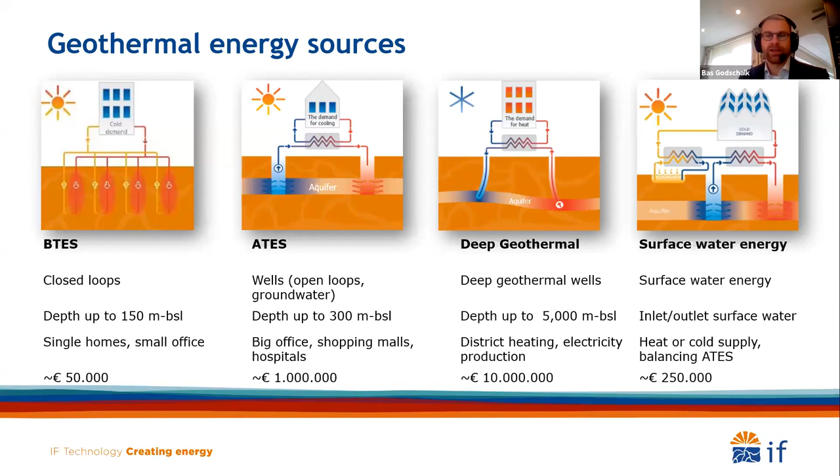Let me go a little bit more into detail on aquifer thermal energy storage systems. I think the most important is that you really store the seasonal heat and the seasonal cold in your subsurface. By storing this energy, you can reuse the heat from the summer during the winter time. And during the summer, you can cool your buildings directly by the cold water which has been stored in your aquifer. Important is that we only have a very small temperature difference in the aquifer.

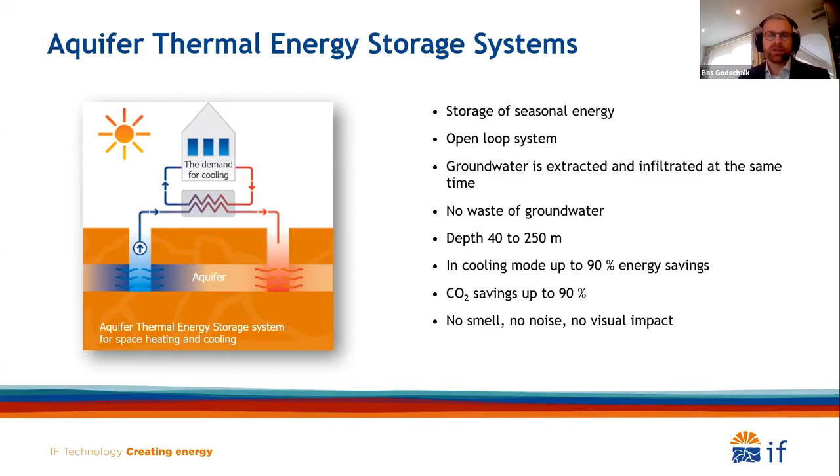The normal temperature is about 12 degrees in the Netherlands. So our cold well will become about 7 degrees and our warm well about 17 degrees. This results in a very low impact on the chemistry, physics and microbiology in the subsurface. Another very important point is that there is no depletion of groundwater. The amount you abstract is exactly the same as you inject. That is a very big advantage when you also want to protect and take care of your groundwater resources. And of course, very important is that your energy delivery is very efficient, so your COP is very high.

Let me give some examples of projects. On the left side, you see the Technical University of Eindhoven, which is one of the biggest ATES projects in at least the Netherlands, and I think Europe and maybe the world, developed during the last 20 years, starting with a small heating and cooling grid, connecting a couple of wells and a couple of buildings. During the years, they expanded by adding more wells and more buildings. This is a very smart growth model, spreading the investment cost over the years, while in the meantime you already have the savings of your investments.

Second project in the middle is in Amsterdam. If you look at the numbers, you can see that the max flow rate will be about 500 cubes per hour for 2 wells. So that means that we can abstract here with just one well 250 cubes per hour, which is a very high rate and which can only be done around Amsterdam, where we have a very nice sandy aquifer.

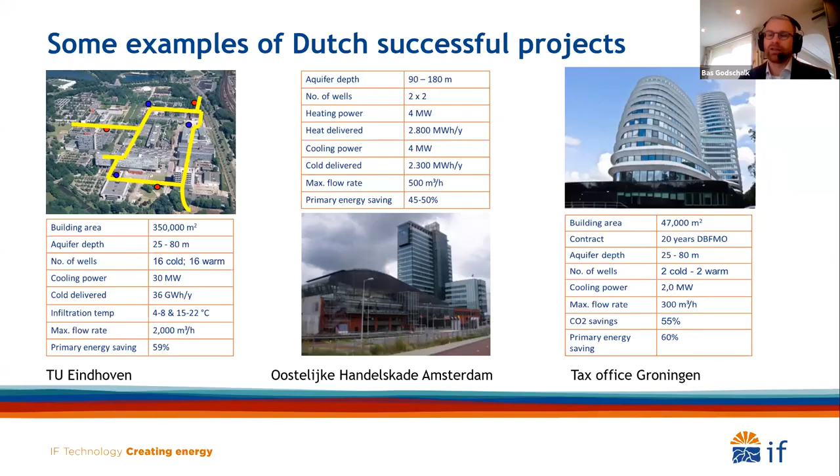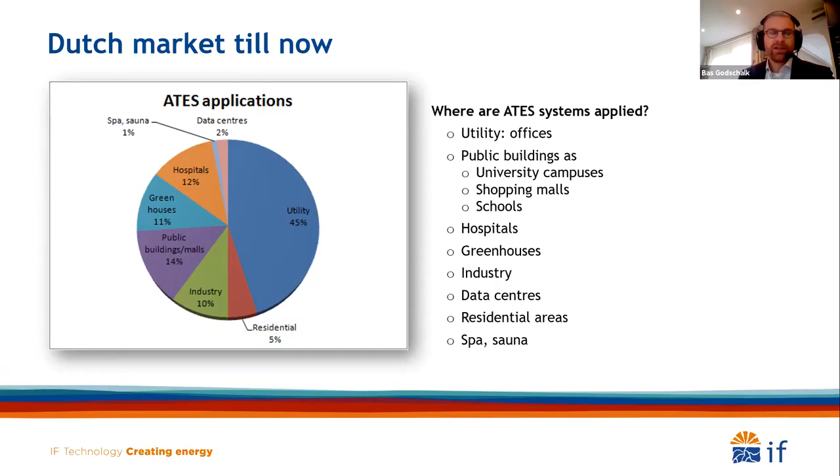When we look where ATES projects are realized, more or less half of them are commercial buildings like offices, and the others are hospitals, greenhouses, public buildings, and also industry. A smaller part is the residential area, but that will change, and I will tell later about that trend. In the Netherlands in 1990, there were only a couple of systems, but during the years the amount of systems expanded, and at the moment we are counting around 3,080 systems.

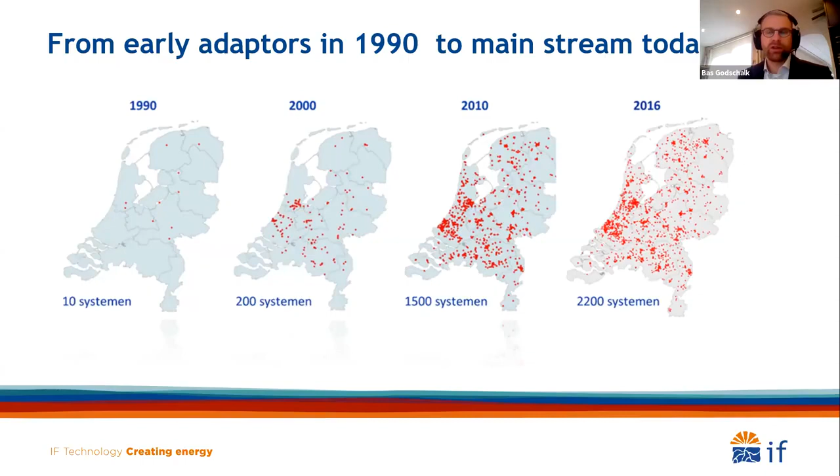Worldwide, we see that in Sweden there are also many systems in the southern part, and some in Belgium, also in the UK, which we worked on in London and Birmingham, some in Germany and other countries, but not very high amounts, especially not for bigger systems. In many countries you have some combination of groundwater abstraction with small wells and heat pumps, but not the big applications.

Why is it a success in the Netherlands, and why could it become a success also in Ireland, in Northern Ireland? I will go into a few details. I think one of the critical issues is, of course, you need an aquifer because you need to abstract and inject the groundwater. We have very proper aquifers, and that means that nearly everywhere in the Netherlands you could apply this technology. That makes it very attractive also for project developers to start up a project, because they more or less know that they can apply it.

And we have also a very good database which is freely accessible at TNO, and you can have a very accurate idea of how the layers are built up, which means that you can save on the initial cost like doing a test drilling. And this is very important because then you can move on quickly.

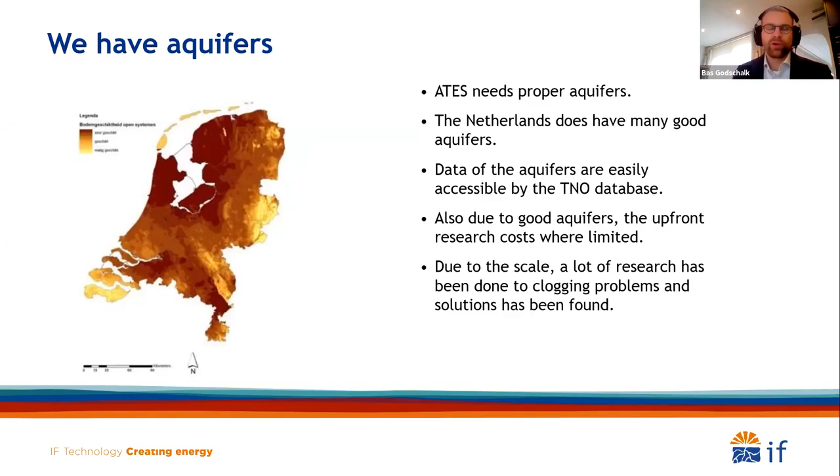But it's also very important that you have a good climate, because you use the seasonal heat and the seasonal cold to store it, and you reuse it in the next season. And we have seen that especially cooling is very efficient, with COPs between 30 to 40, which means that you can have a very attractive and good business case.

That will really help. I've just worked out a very small business case for a project, a building in Belfast. I did some assumptions just to show you a little bit, to get a little bit of feeling of the numbers. It's a big building with 100,000 square meters. And based on the starting points, I made an energy concept. And by using the energy concept, I made a cost calculation.

And in the upper part of the table, you can see the investment costs. And of course, the ATES solution will be more expensive than the conventional heating and cooling by gas and using chillers. But when you look at the exploitation cost, you will see that the energy costs are much lower than in the conventional way. And that brings, if you divide these numbers by each other, your return of investment to around 2.5 years.

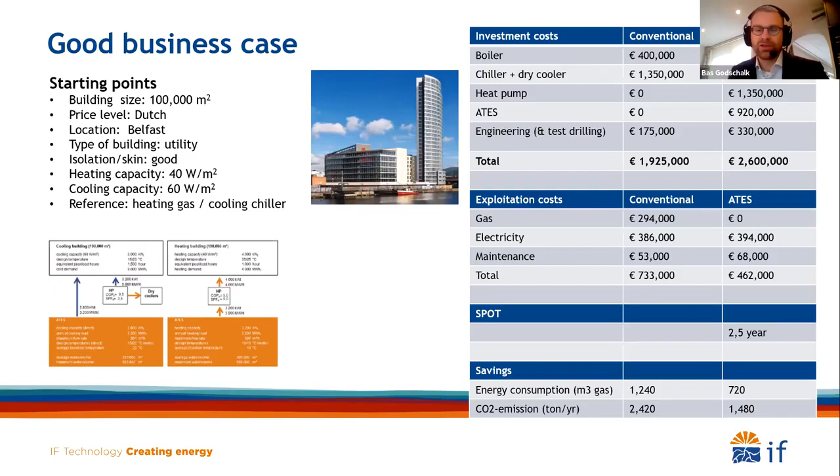Of course, it depends on the starting points and assumptions you make, but it's quite a normal number in the Netherlands that your return of investment will be between 2 to 7 years. So you also see in the last part that you can have serious CO2 savings by using ATES.

What's also very important is that we have a proper legal framework, because you see in countries where there's a lack of a good framework that project developers are not willing to invest, because they're quite unsure if they can run their system for many years. And that's why it's very important that you work on a very good, reliable framework where it is clear what you have to submit to get your permit, and that you also have a clear demand of what you should measure during the time. And don't ask too much, because then the exploitation cost will become very expensive.

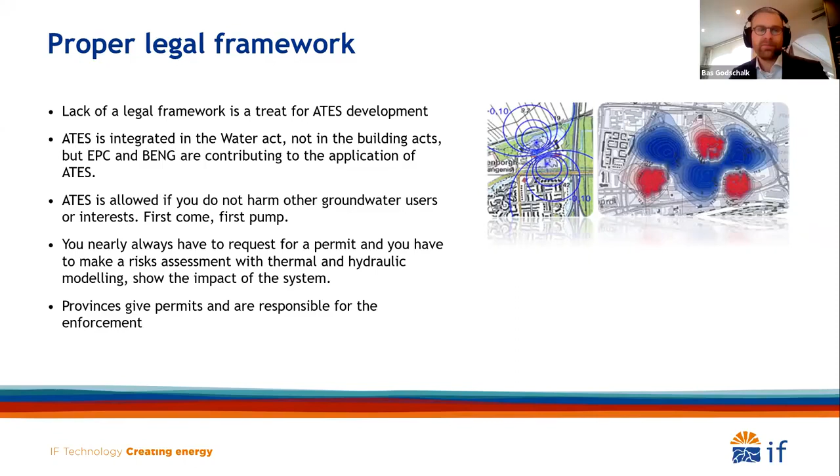What's also very important is that you know that there are different interests which you should bring together. So one department wants to save energy, the other department wants to protect the groundwater, and the project developer wants to earn money by developing good and green buildings. So you have to bring these different interests together and put the point on the horizon where you want to go, and then think how you can combine these interests to have a good legal framework.

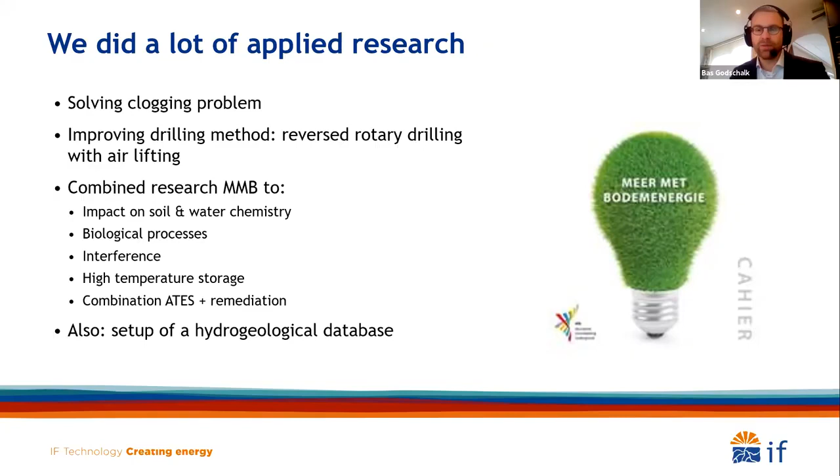As mentioned, the return of investment is quite interesting. In the Netherlands, there's no subsidy for ATES systems, but the government supported the technology by investing in research. So we solved in the beginning the clogging problems. We improved the drilling methods, because it's very important to have a reliable well. And after a couple of years, we did a very large research to measure all the impact on the chemistry, on the physics, biological processes, etc., which is summarized in the Meer met Bodemenergie brochure.

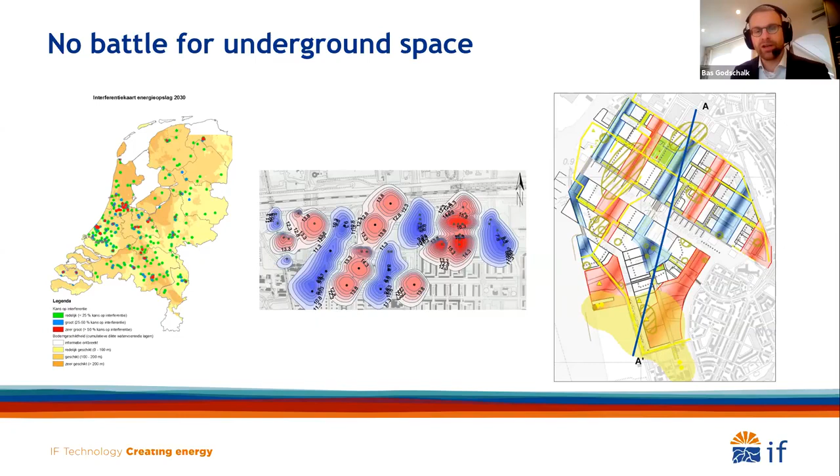In some countries, some cities, we see that there are so many ATES projects that the underground becomes a little bit crowded. So some cities start to plan the ATES systems, because they think that will be better to get more systems realized, and that they won't compete with each other, but contribute to each other by making cold zones and warm zones.

Another trend in the Netherlands is that the residential areas are becoming more and more important for the ATES business, because the authorities have decided that we stop heating houses by using gas. So all the project developers have to find new solutions. A new solution could be that we use ATES; since the business case is more profitable for cooling, you combine it and also use it for heating. And we see that it will often also be combined with surface water as an energy source. So that is the most important.

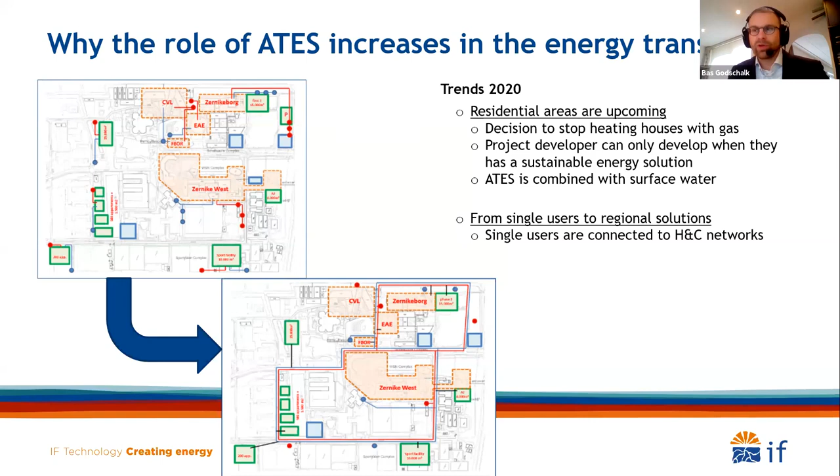So I really hope that it all has to do, of course, with game changers. Entrepreneurs who really want to do, people who are very curious to do research, etc. So I think if we can work together, and we are open for sharing information, for giving trainings, or showing you Dutch projects, you are welcome to come to the Netherlands when the coronavirus has gone back a little bit. So I hope that we can collaborate in future.